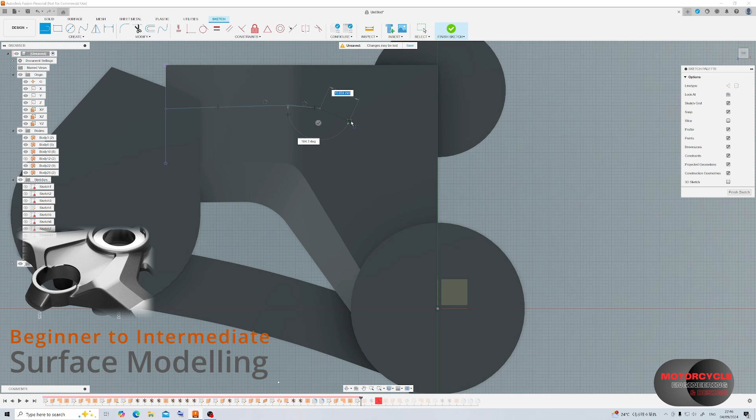So I start with drawing out the top profile and include a straight edge at an angle towards the ignition barrel mounting. I then extrude that surface up, ready to trim away the top of the quilt.

Now I want to connect this straight edge exactly to the edge of this ignition barrel mounting. So to make that easier, I'm actually going to cut away part of the ignition barrel mounting so that I can get a hard point on the circumference.

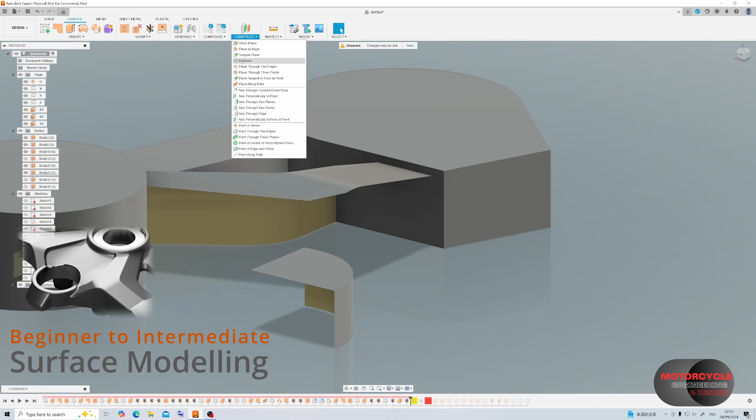Now that I have that hard point on the circumference, I'm going to use the plane through 3 points feature. I'm then going to sketch the surface that's going to be connecting this edge to the ignition barrel mounting.

Now because the straight edge is at an angle on the surface that it's been drawn on, and that surface is at an angle relative to the ground plane, we're going to get a kind of twisted or angled surface that's going to be formed here.

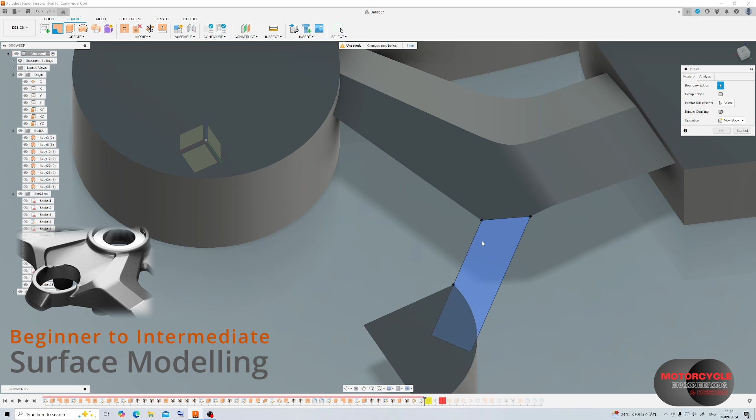Then we can trim away the unwanted material.

Now we can start looking at creating the vertical surface to join this top surface to the more complex, interesting surface feature. I'm going to do this using two sketch features.

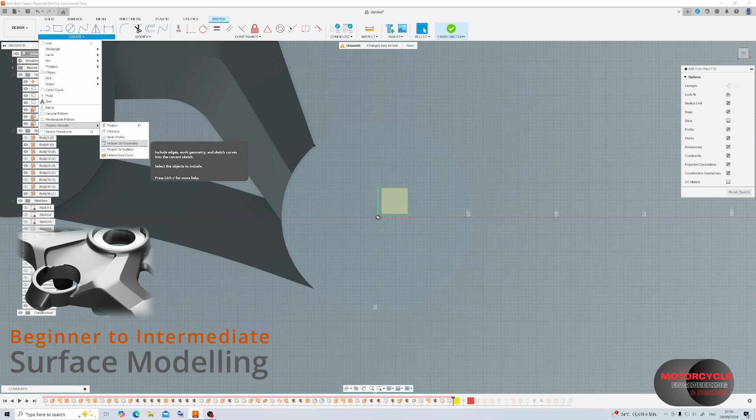The first one is going to be a sketch on the profile, and then once that sketch is finished, we create a new sketch and then reference that sketch to be projected to the surfaces, and then we'll change it to along vector, selecting the z-axis.

Once that's done, we can start extruding the surface down just a few millimeters, and we can add taper if we want to.

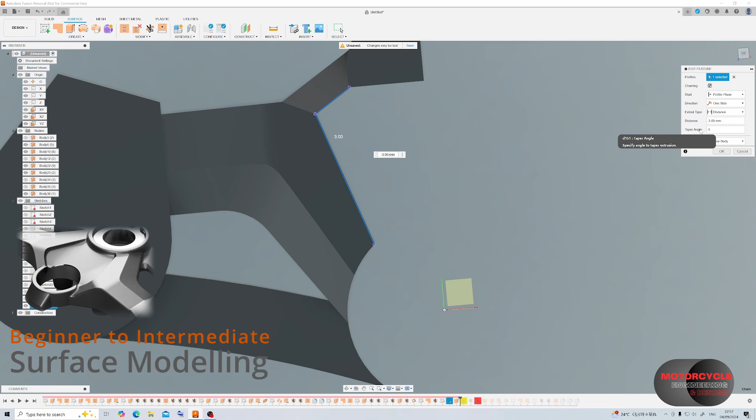I'm going to start building the more complex surface. So I'm going to do this with two surfaces really. The first one is going to be a revolve around the axis of the steering stem.

So I'm just going to use a straight line in this revolve, and I'm just going to adjust the position roughly to where I want it to be.

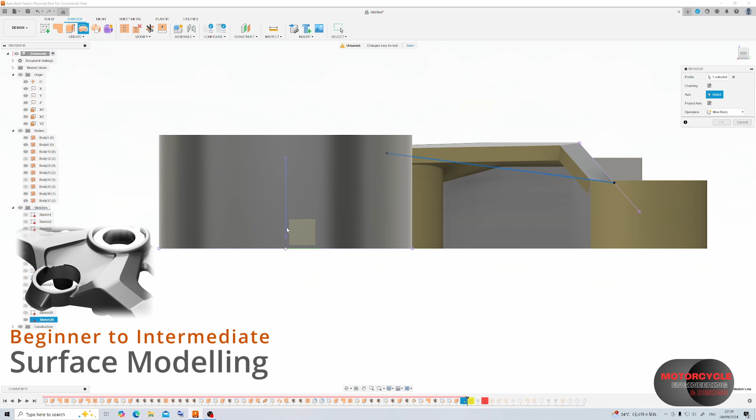Then we can trim away the right hand side, since we'll be mirroring this part, as well as the lower part because we won't be using that.

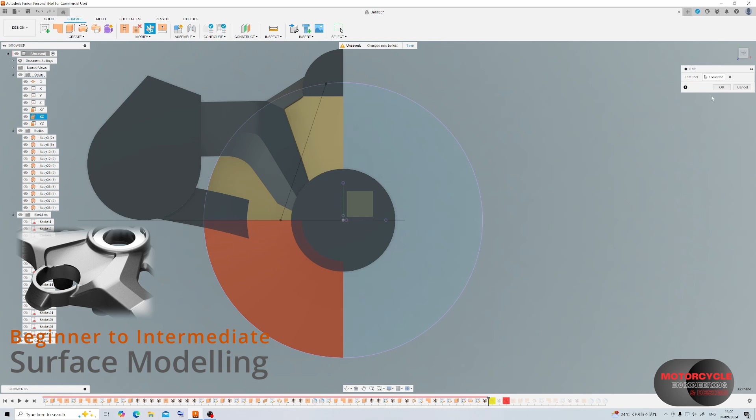Now in order to connect the lower surface to the top surface, I'm going to need to join those surfaces with another surface feature. And in this case I'm trimming away the left side of this quilt using this sketch.

This sketch is going to be the angle at which the surface is going to be swept. So if you want to adjust that surface, I'll have to go back and adjust this sketch.

So in order to create the sweep feature, I need to create a plane on the end of this curve, draw a sketch, constrain it at a length and an angle.

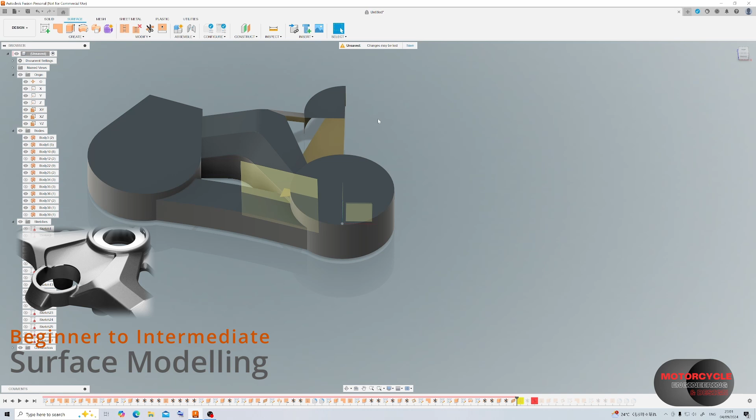We're about to see the problem with using this feature as freely as I'm using it now. Since there are a couple of lines defining the geometry of this surface, it's a bit more difficult to get it exactly how you want.

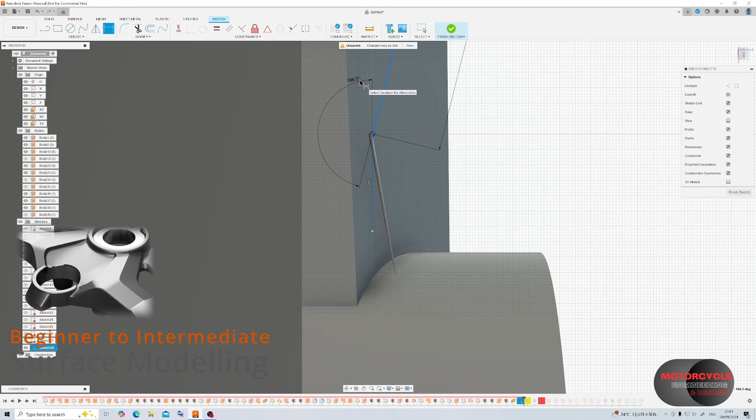In this case we have the line that's creating the path for the sweep, and then we have the sweeped curve as well. Not only that, but the surface that is being used to sweep along is also at an angle in its revolve feature.

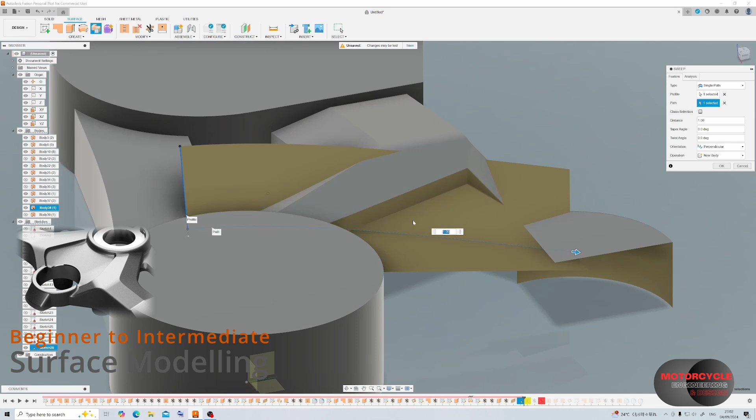So now we see we are extending above part of the surface we want it to join into.

Now we could go into the sketch and modify the dimensions to try and improve this, which I will show in just a moment, but we'll see that the result is not ideal since there are so many other features that influence this design.

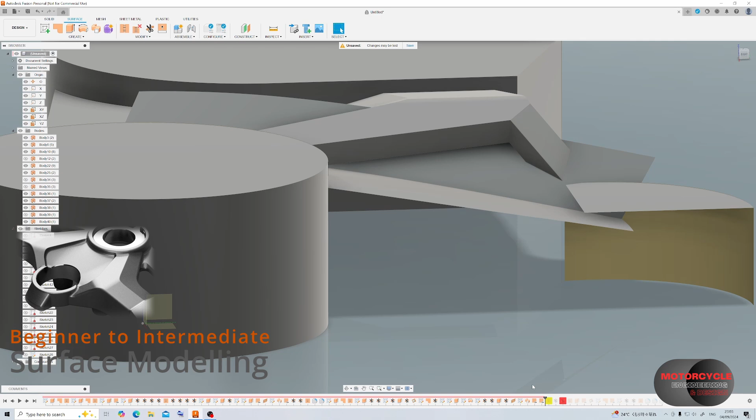So now looking at one of the other methods, we can create a plane on 3 points and then create a sketch to patch.

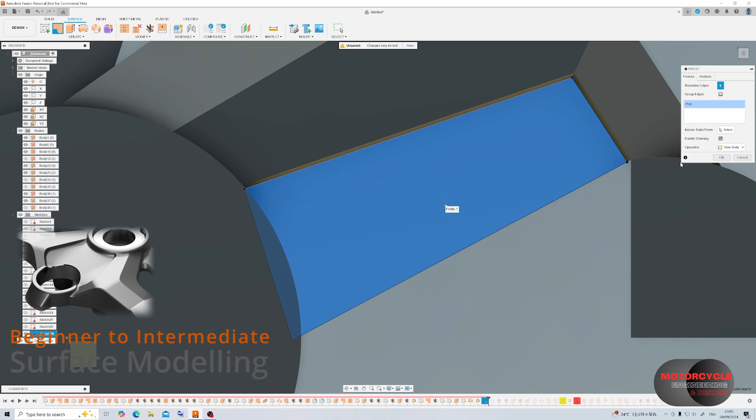Now it's just all the housekeeping, trimming away the excess material and stitching together the quilts.

We may have to extend some surfaces to make that possible, but in some cases this material is going to be trimmed away, so it's not really going to be a problem.

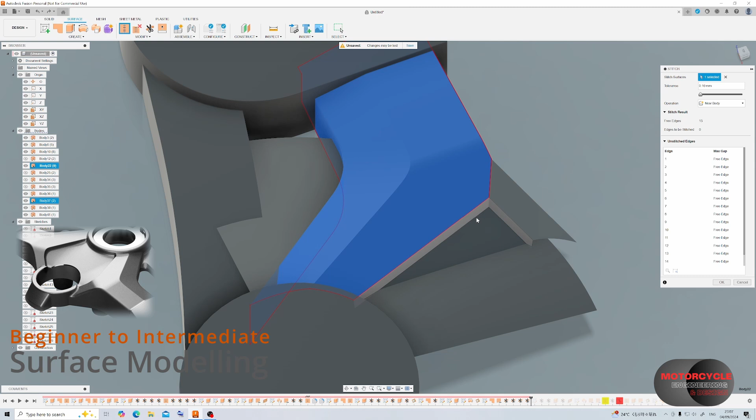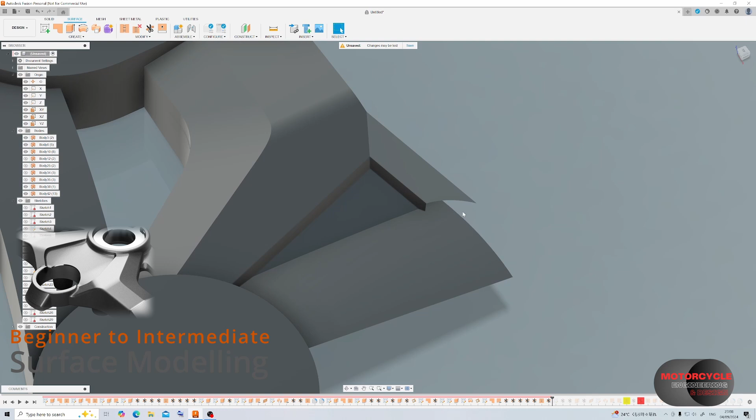So at this point I can start looking at bringing in the ignition barrel surfaces and stitching them into the main quilt.

So I just have to recreate this cylinder because I've already trimmed away half of it, and I actually need that now to cut away some of these surfaces.

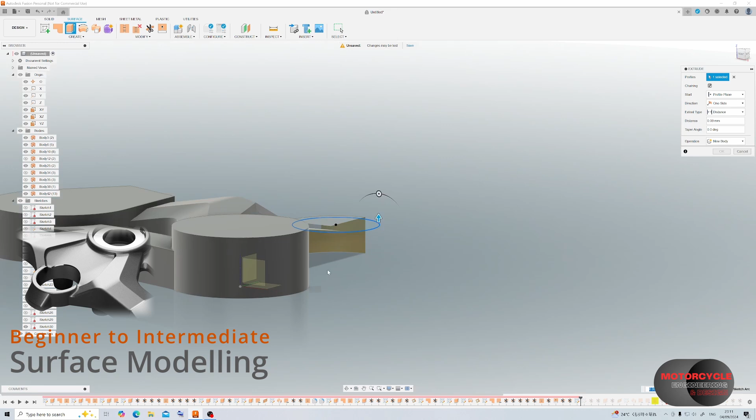So from now it's just going to be tidying up, trying to trim down the surfaces and stitch them together to a single quilt.

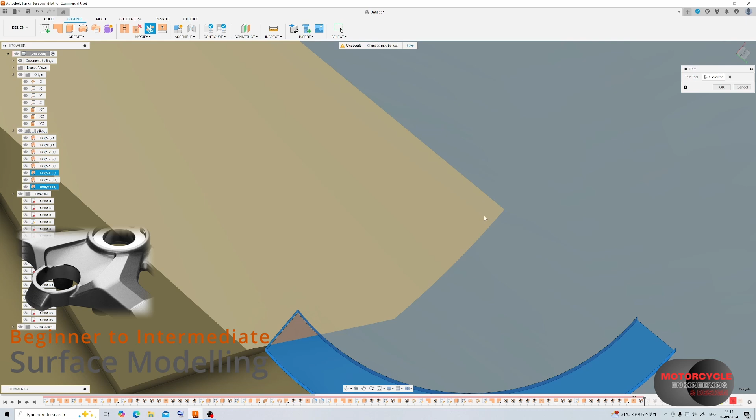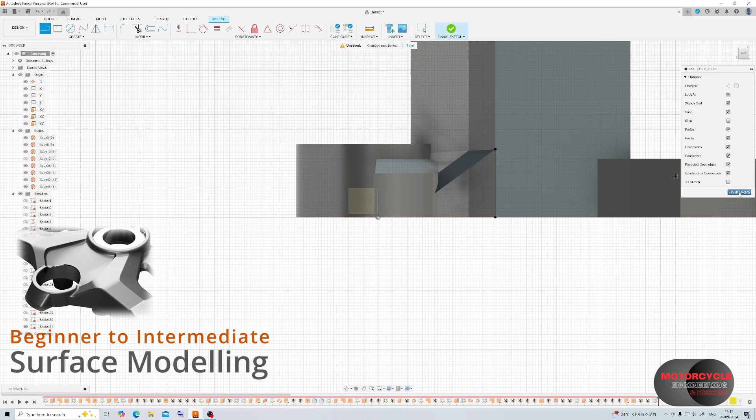So there are still some surfaces that we need to build around the profile of the part, and that's starting from here. I'm going to trim this part by the line here and then create a patch between this edge that we've just drawn and the edge for the ignition barrel.

Again, using the plane with 3 points and then the patch feature.

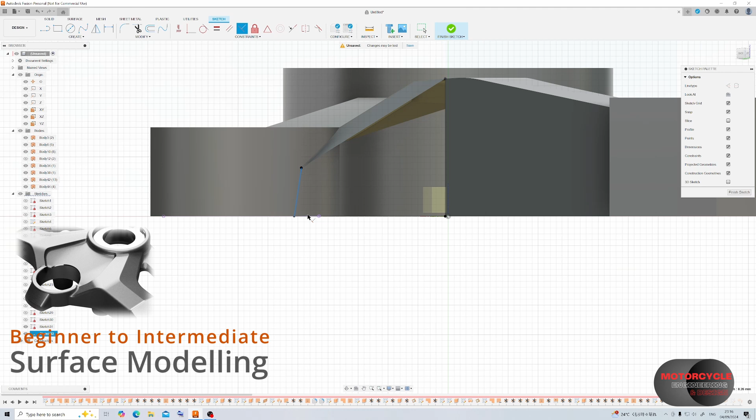Lastly, there's the inner surface of the ignition barrel mounting.

Here there's different levels that we want to trim it to, so we just need to extend these surfaces to make sure everything can be trimmed cleanly.

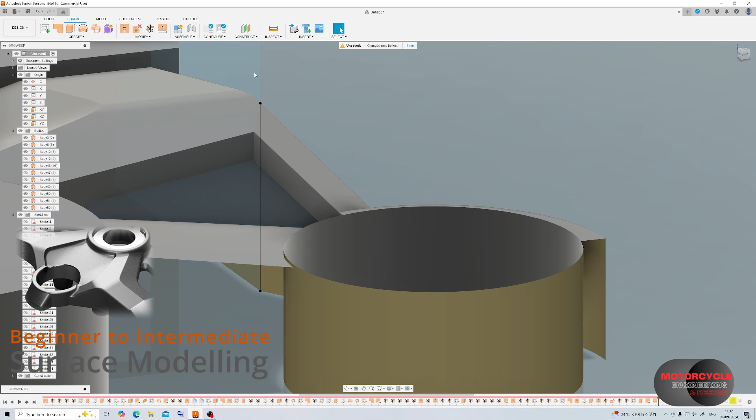Okay, so now ready to stitch this into the main body and then finish trimming off the other intersecting edges.

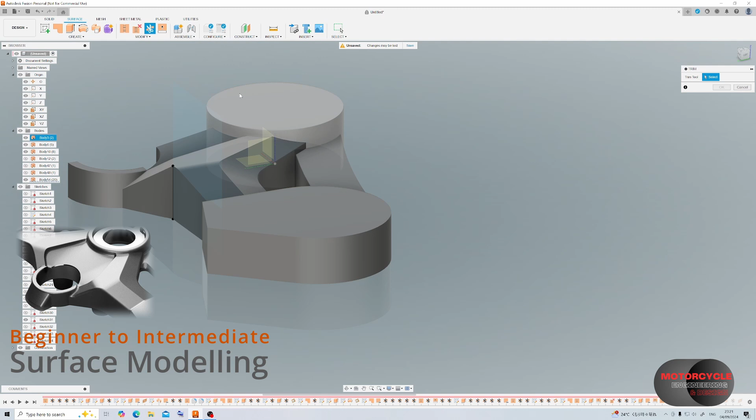So now all the surfaces are complete, we can finish trimming and stitching that all together, and then we can mirror that across to have one final top surface.

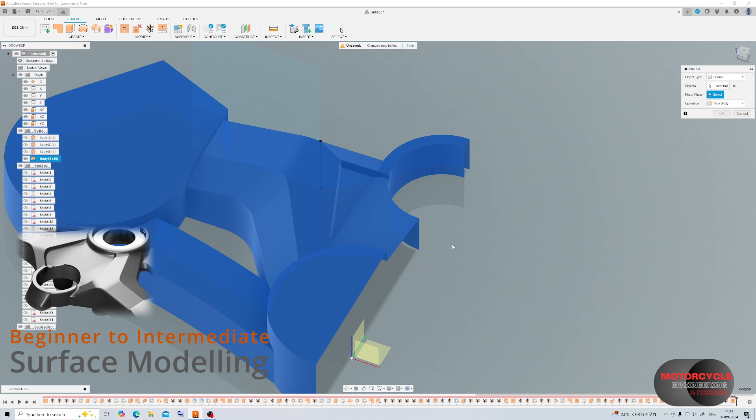So from here I need to add the ignition barrel mounting features on the underside, and then I will start looking at the aesthetic features or the rounds and chamfers.

You can also test out the zebra analysis tool on the whole part just to see how the surfaces are looking.

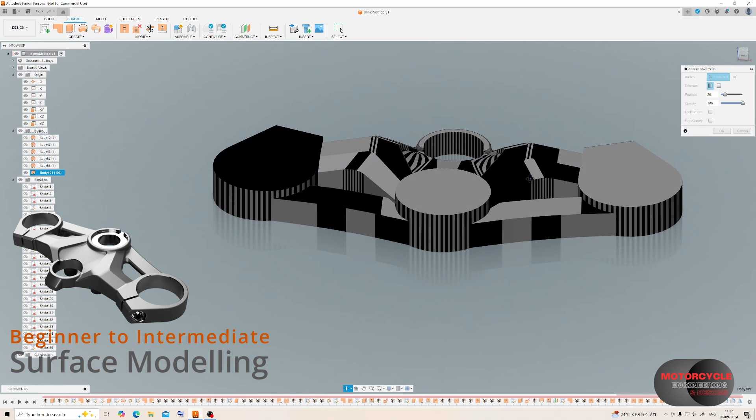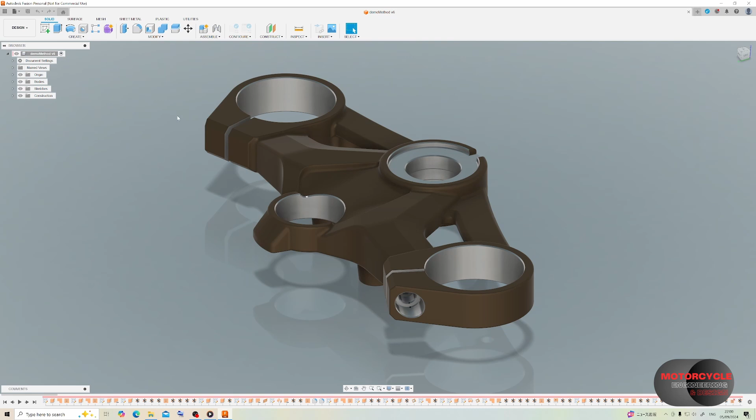Okay, so using solid modeling, I added some final features and some cuts to the piece. I've then come into the render mode and then added some material appearances to the part.

So I think this is going to be my last video modeling top yokes, unless there's any requests in the comments. I think the next thing I'll try to do with this would be to 3D print it and then potentially paint it to try and make it look as real as possible.